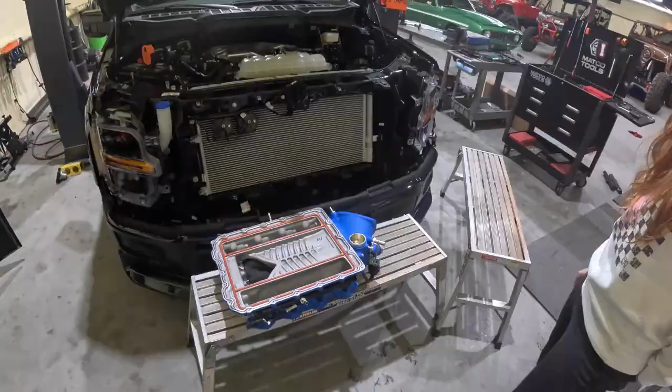Okay, so the next part that we're going to do is we're going to throw on the supercharger onto the motor. I've got my assistant here. She's going to help me get this up onto the motor.

So I'm going to go ahead and switch cameras to overhead view so y'all can see better what we're doing as we're installing this. So I'm going to get this off of my head, get this put up, and then get some video of the overhead shot.

This will be a little bit easier for me to get this into the engine bay. You got it? I can just set it and rest it there. All right, stop there. You got it? Go ahead and get it inside the engine bay. I'll need to reach. It's fine.

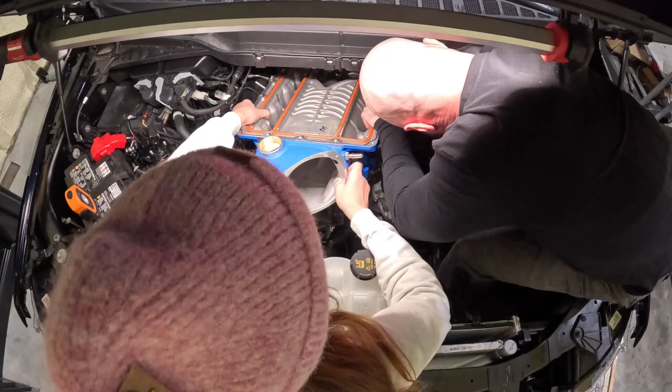Okay, hold on. There's some stuff out of the way. Let's see if I can get this other piece back in. Where did it go?

All right, so for the next part, we're gonna get these short bolts in the corners and then get them hand tight. We're gonna need some blue Loctite. So let's get those installed and then we'll get the interior bolts installed.

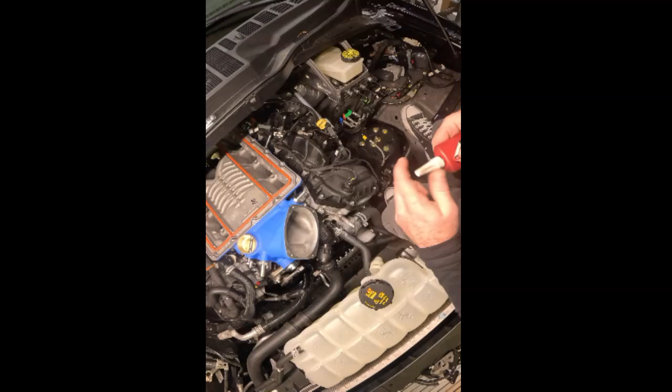Okay, so after we got the supercharger base put down and the 4 corner bolts hand tight, we're going to get this last bolt into the supercharger bracket. It's going to go up top here. So we're going to thread that in, and that's going to be torqued to 22 foot-pounds.

Okay, now for this next part, once you have the O-rings installed on the bolts for the supercharger, we're going to get these put in, blue Loctite, and then there is a specific torque order. So you're going to do 2 passes, one at 88 inch-pounds and the second at 106.

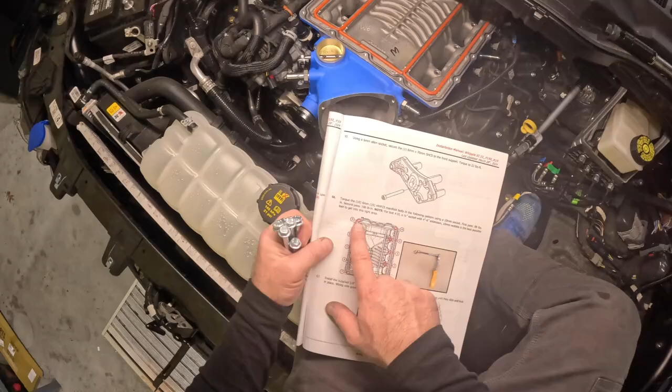Not gonna lie, this number 9 is so hard to get to that I'm just gonna have to do it by feel and hopefully get it torqued down properly. All the rest of them I can get to. That one has been a real pain in the butt. So let's get these installed.

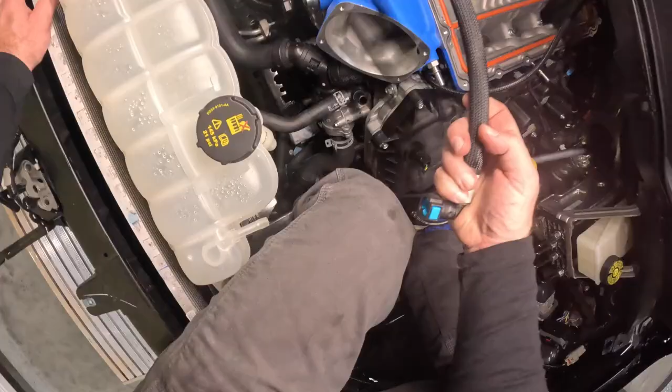All right, so this is just getting on the rear. Also the 90 degree. This one's a 45. This is gonna go on the driver's side. So this is driver's side.

All right, once we have that crossover tube installed in the rear, you're gonna connect the MAP extension connector to the MAP sensor that is in the supercharger. I actually already ran that, so mine is already plugged up. I just found it easier to run that now and get that hooked up and out of the way.

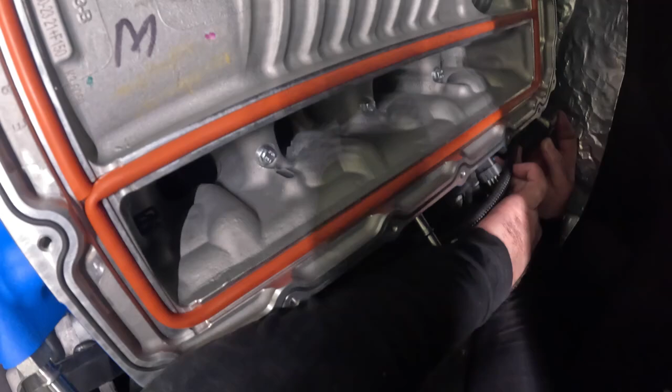So I'm just going to go and plug in the 2 fuel injector pigtails to the stock harness on both sides, and then we'll move over to the pigtail for the throttle body. All right, got that installed.

Now we're gonna run the pigtail for the throttle body. I think that's gonna loop under and come under here. I'm gonna take a look. Or actually, it's right there. Oh, let's see.

All right, so this is the throttle extension wiring harness, and it will say throttle extension on the tag. So this is gonna go and connect into here, and then lock it, and then it says to run it underneath the throttle bracket. Actually, I think this way is going to be easier.

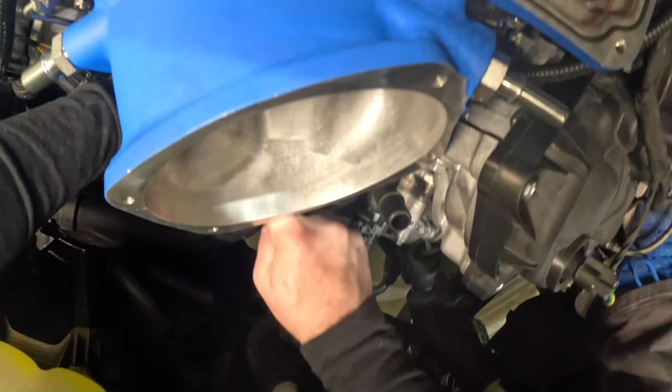Okay, that is easier. So fish it through with the small end first, the female end through, let's see. So underneath and through until you hit this connection. So this is going to go this way, and it'll keep it up and out of the way of the belt.

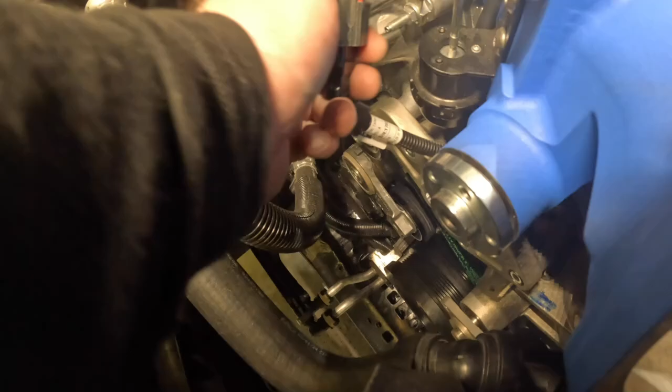And that will stay up out of there, so that way it doesn't hit the belt. And it shows to zip tie it, but we'll keep it loose for now so we know which way it's going. But it looks like it's zip tied somewhere up in here. I think it's this way, or maybe it's this way. Anyways, get that done up and out of the way, and we'll move on to the next step.

All right, the next step is going to be reinstalling the water pump pulley, and I'm actually going to jack my truck up. It'll just be easier. So we'll get that installed, and I believe it's 14 pound-feet to torque them down.

All right, it says to torque them down, but there's no belt on there, so there's no way that I'm gonna be able to get it torqued properly. So I'm just gonna tighten them down, and then we'll torque them down when we get the belt on there.

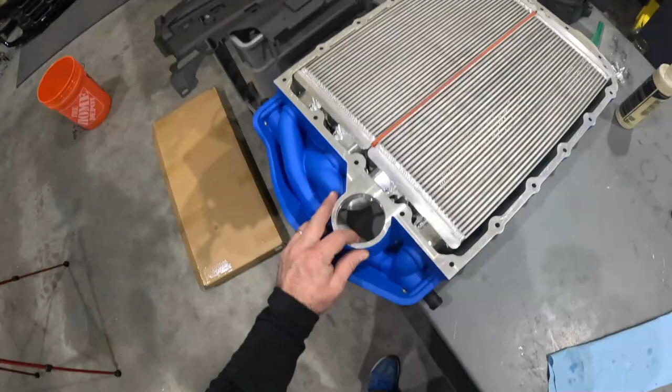All right, so next we're gonna install the bypass O-ring on the lid passage, and then just grease that and install that. So that's gonna be here, this is where the intercooler brick is at, so this is gonna get installed right into this passage right there.

It says to use a generous amount. So whatever that means to you.

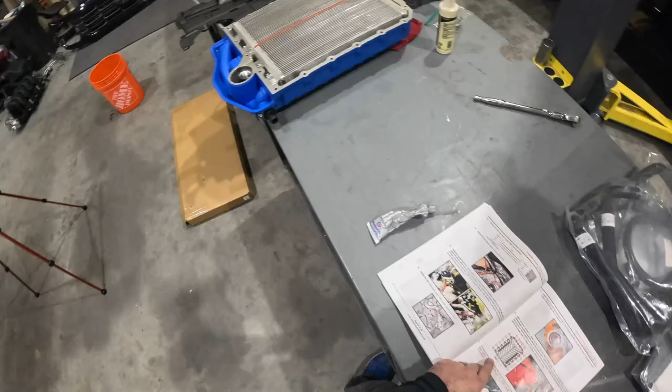All right, once we have the O-ring installed and lubed up, it is now time to install the lid. So it gives you torque specs, torque pattern, and then I think it looks like there's 3 bolts in the front that are going to be a different length. So check that, I'll get that out here in just a second.

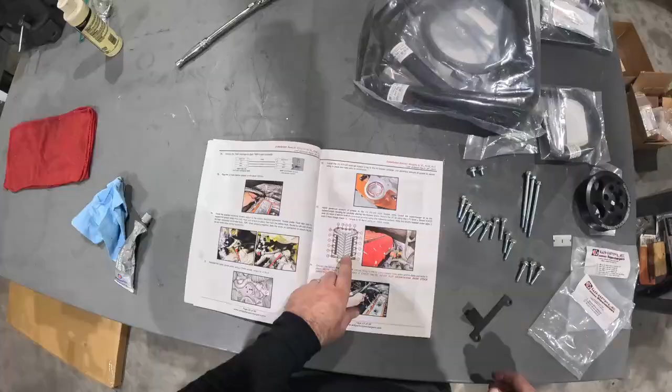All right, once you have that lid on, you're gonna get the bolt kit, and we're gonna start locking everything down. Okay, so for the bolts, you're gonna get a bag of lid bolts, and then you're gonna have some that came off, or that were already on there. I took mine off when I set mine out for porting.

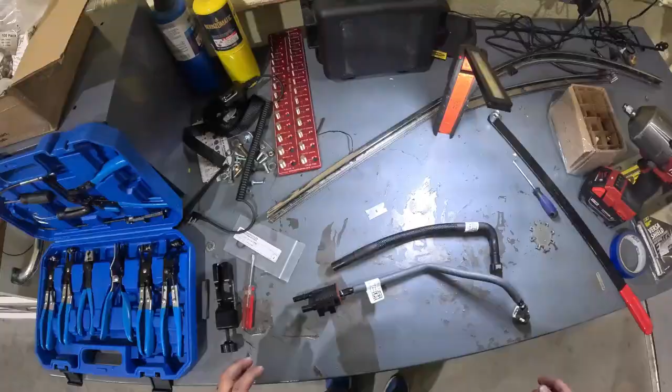All right, so this next part with the EVAP, I had actually been fighting this because I did not know, or I didn't read properly, that this tube is supposed to replace the one on here. It doesn't specifically say that in the instruction manual. It just says to install with supplied 45 or 55 degree push fitting, but it doesn't say anything about cutting this off and replacing it with this, so the instructions are not very clear on that.

I just happened to see a picture and it did not look like this same tube, so I went searching through all this stuff and found this tube, and I'm assuming that this goes to it, so hopefully this is what it's supposed to be. If not, then I'm about to have to buy a new EVAP solenoid. So we're gonna cut this off and install this, and then reinstall this whole piece.

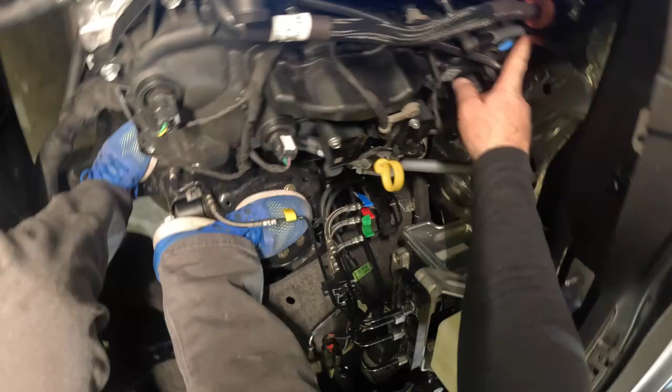All right, looky there, that worked. All right, so this had to flip up versus the way it was down on the intake manifold, so everything would clear. So just make sure all these fittings, you press them in and everything locks. And should be good to go on that. And we'll move on to the next step.

All right, so for the next part, we're actually gonna reinstall our hoses from our catch can.

All right, we'll probably have to play around with placement for this, just because everything's going to change, because we still have coolant hoses that's going to go in there.

So this next part, we installed the coolant overflow hose. There is a check valve here. It's going to go closest to the coolant overflow tank, and the other side goes to that 45-degree barb we put into the filler neck. You'll have to get some needle nose down in there to get that clamp on. The hose ends on this side and this side are two different sizes, so if you forget which way it goes: the larger hose end and the check valve goes towards your overflow tank, and the smaller hose end goes to the 45 on the water neck down there.

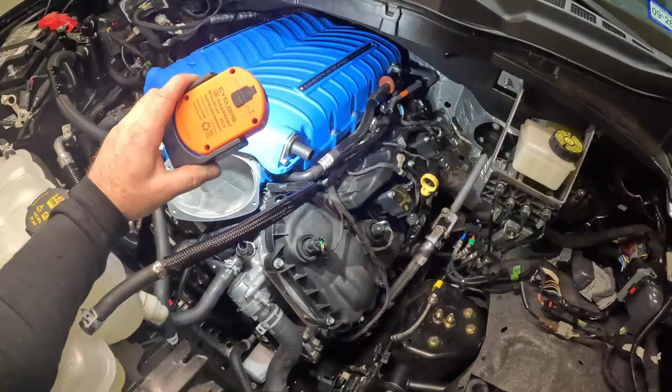So for the next part, we're going to install, what was it? Oh yeah, the idler pulley. So we're going to get the smooth idler pulley, spacers, and T-nuts, and install that.

So what we're going to need is the smooth pulley. You get two, one ribbed, one smooth, so this is smooth. We're going to do this with this stepped spacer, and in the bag it comes with two other spacers that look identical. We're going to use one and put the other back in the bag to save it. Then in the bag is this, what they call a T-nut. And in the bag we got those other bolts out for the bracket, you'll have two of these larger cap sockets left, so we're going to use that for this as well.

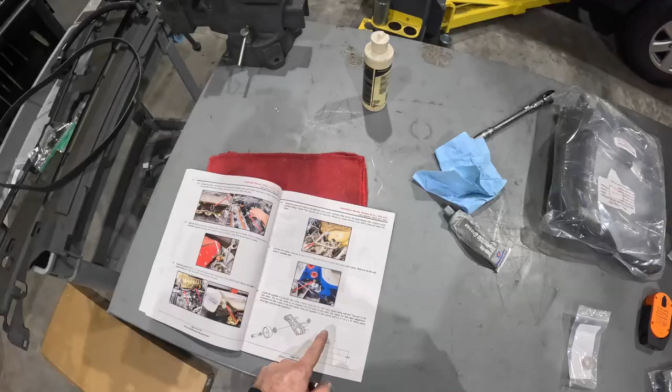So it says to install this behind the bracket, this behind the pulley, and this in front of the pulley. Your bolt goes through here, and then you bolt on. It says to do it hand tight, so we'll just thread that in there until we get the belt on.

I don't know if it matters or not, but in the instructions it was showing that the thread side was up towards the hood, so that's the way I'm going to install it. It doesn't specify either way.

All right, so that is on there, hand tight.

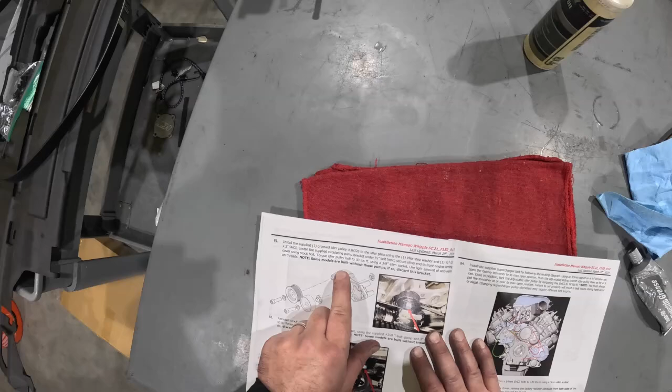Let's move along. Okay, it looks like we're going to install the ribbed idler pulley next, and we're going to need another one of those bolts and a spacer, and a bracket for, what is this, a circulating pump bracket, which I do not have in my truck, so we're just going to install that pulley.

Make sure that aligns. Mine was a little off because it was stuck in between the bracket and the spacer. So I just checked that, made sure all this stuff spins freely. And we're going to install the belt next. Actually, we're going to install the supercharger pulley next.

So install this hand tight. Okay, so we're going to get these bolts, put them on hand tight, 5mm.

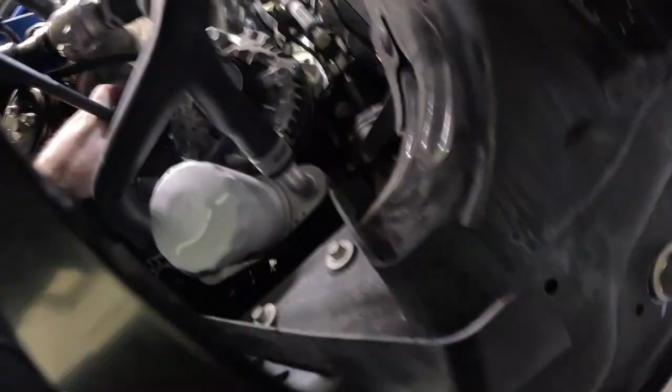All right, so once this is installed, just check to make sure the belt is in the grooves and runs the proper way. All right, oh, that looks good. It goes around. Alternator looks good, all right. Looks like the belt is good. Let's keep moving.

Okay, so yesterday we left off. We had just got the belt put on the supercharger and wrapped it around. Now the next step is going to be to get your idler pulley torqued down. In order to do that, you need to move your adjustment idler all the way, and then once that's moved, you can move this because it's on that little T-slotted bolt or nut. Pull this down, and once it's pulled down, you're going to torque it down to 18 foot-pounds, and then you can release this. I don't know how well this is going to get shot, but this is what you got to do to get this done. Let me get this camera back on my head because I got to use both hands to get this done.

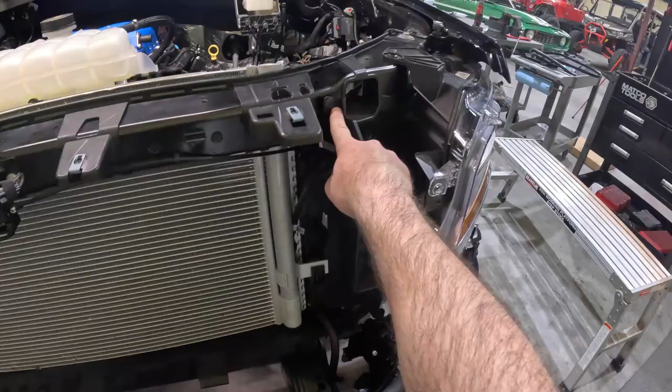This next part we're going to move on to the cooling system. The next thing you're going to want to do is remove this closeout on both sides. You've got two push pins here, and then 1, 2, 3 here, and one at the top. Same thing on the other side, one at the top, 1, 2, 3, and then 2 here at the bottom. It states in the manual that the passenger side will not be reused, but the driver side will be reused. So let's get all those pins out and get both those pieces taken out.

All right, we got both of those off. If you need to cut them, cut them. They sell these push pins at pretty much any auto parts store, so you can get new ones if you need to. Once those are out, we can move on to the next step.

All right, so for the next part, we're actually going to remove this entire horn assembly. You're going to need to unplug it and then remove the bracket assembly.

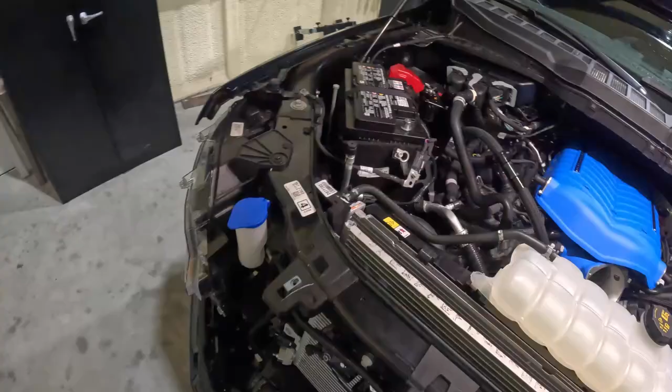Once we remove the horn assembly, we are going to install the heat exchanger. We're going to get all these parts, the heat exchanger, the bracketry, all that, and get it installed onto the vehicle.

To install the brackets first, you're going to have a driver's side, which is left hand, and passenger side, which is right hand. You're going to install these first onto the truck so we can install the heat exchanger after that. You're going to get a bag of cooling system bolts.

And then we're going to need this clip bolt, this... what do they call it here? Dowel nut. So we're going to install this dowel nut.

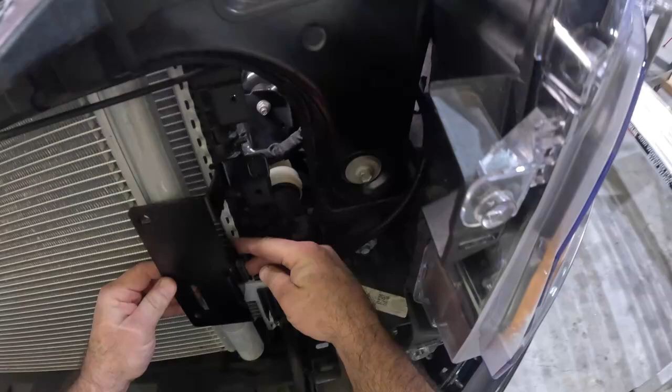All right, so they give you a little piece of rubber inside there. This is going to slide into this notch. And then this is going to slide over this bracket from the condenser, hopefully. Might need to get a screwdriver to open that up.

Alright, then we're going to get this dowel nut. It's going to go in here - I don't know if you can see inside here.

Okay, so it doesn't say anything about this in the instruction manual, but sitting here messing with it, it looks like this bracket is going to go in place where there is a bolt for the condenser. You're going to need to pull this out, put this J-clip in, that's going to bolt through, and then they give you a new bolt that's going to bolt through here. The bolt that was there previously is not long enough to fit in there, so you're going to have to use this one they gave you. It doesn't say anything in the instructions about taking that out and putting this in its place, but that is the only place that I can see that it is going to be able to go.

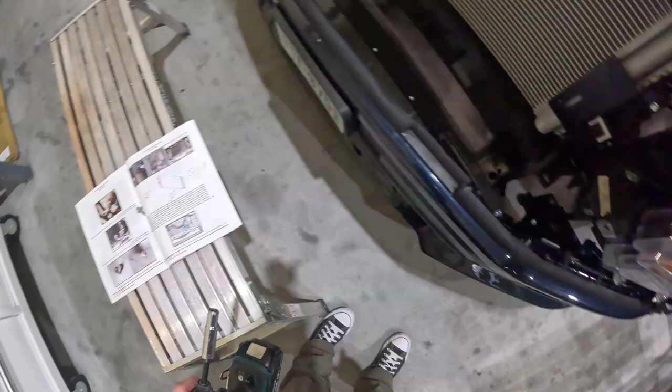So hopefully that is in the correct position. We will get the heat exchanger and put it up and see if everything goes on. If you can see here, this goes through here, that bolts down. You have a piece of rubber that goes around the bracket from the condenser, and then this slides over that to help secure it as well. So that's how that side goes on. And then those are torqued down, but I'm not going to do that yet. I'm going to put the heat exchanger on first, get everything aligned, and then torque everything down.

All right, so as you can see, I fit the heat exchanger up inside here. It's loose. Basically, this plastic piece is just really holding it up. I don't have anything bolted down yet. I wanted to get this placed.

So you're going to have a bag with these little spacers in there. And then you're going to get 4 bolts, 2 for each side. So this is going to go in, looks like, yeah, with the ridged side in.

And these are 13 millimeter. All right, so we got that bolted in.

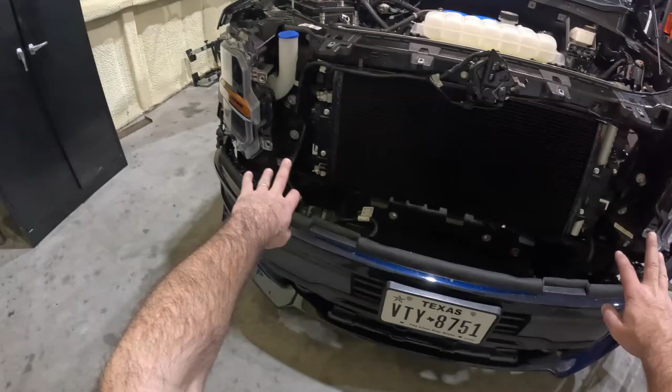So basically I kept the brackets on the side loose so I could get the heat exchanger to align with those spacers and those holes. So I got that bolted down first, and then I aligned the brackets up to get everything flush and then tightened those down. So once you get everything tightened and torqued to spec, we can move on to the horn relocation bracket.

Okay, so for the horn bracket, we actually have to remove the horns from the stock bracket, and then it's going to be on the reverse side, so they're going to be facing out instead of in like they were before.

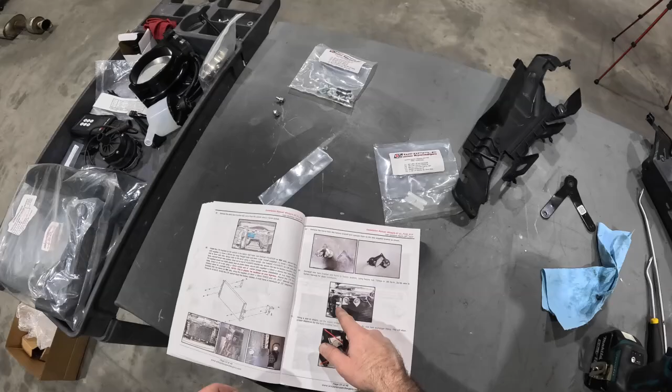Okay, now that we get those reinstalled and we've moved them to the other side, this can go on into the factory location, so this spaces them out from the heat exchanger. Then if the wiring harness is in the way, we'll just need to zip tie that.

And that's it. All right, so I had to rotate mine to get this to even plug in. I didn't have enough slack. Doesn't really matter which way they're oriented, just as long as they're up and out of the way, and there's clearance there. That's all you gotta do. I don't think that's gonna interfere with anything.

So the next thing that we're gonna do is, I believe, remove, I think it's this tab right here, but let me look. Okay, so it looks like we're gonna remove this portion right here to allow the hoses to come down. So we're going to cut here. I'm going to use my oscillating saw to just remove that real quick, and then we'll move on.

Okay, so we're going to remove some of this portion of the plastic right there. Yeah. All right. Once we get that removed, should have enough clearance for these hoses to come down. I'm probably going to take some sandpaper, clean that up real quick, and then we'll get moving.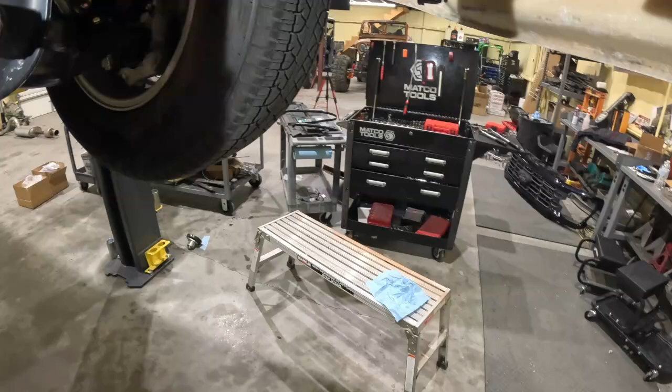Okay, so the next thing we're going to do is, we are currently under the truck, and we're going to move on to installing the pump bracket assembly. So this is going to go to the furthest most point, so right here. So you're going to have two squares, two holes. So you're going to get your J-clip, and you're going to slide it through. Okay, so once you get your clip in, then you're going to install the bracket.

They're going to have a bolt in there with a washer, which I don't really understand why they want that on there, because of the bolt that they put in there, but whatever. We're going to install this and bolt this up, and then we're going to get our pump and bolt it onto this bracket. Okay, we're going to get our bracket with the T-bolt there for the clamp, and we're going to put this around and lightly snug it up.

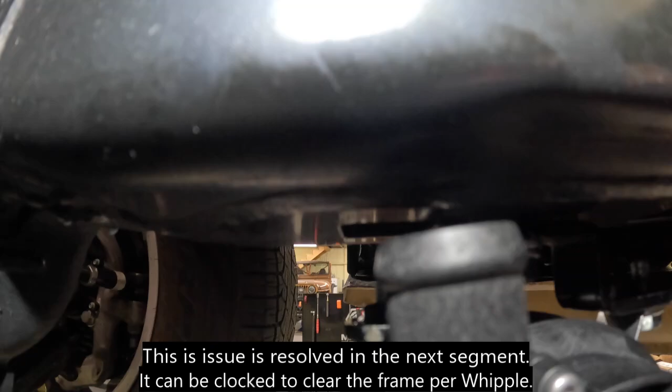Okay, so we have our pump installed. However, I don't know if you can see, this, I think it's the exit tube, is right underneath the frame, and so I cannot get a hose on there. So I have a call into Whipple to see if this is a known issue, if it gave me the wrong bracket to space it incorrectly.

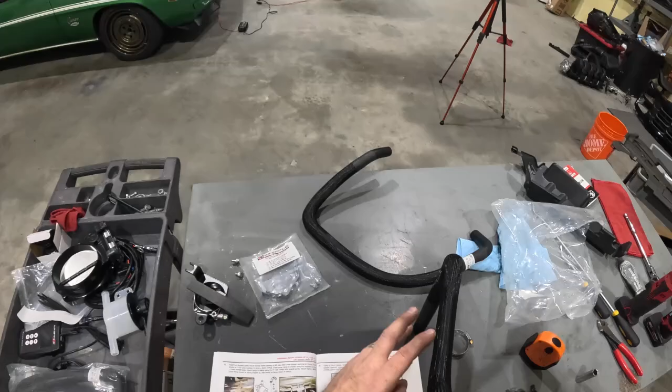So I'm going to wait to hear back from them to see what the fix is for this, but we're going to continue on. We're going to get the hoses put on, try to get the rest of it done while we're waiting for Whipple to get back with us on this. Okay, so for the next part, the first hose that we're going to install is going to be this part number right here, which has a 90-degree on it, which is this one right here. Part number matches the book.

So this is going to go into the bottom of the heat exchanger and into the intake or the exit, so the top tube of the pump, which currently is not spaced where I can get to it. So we're going to install this, kind of leave this loose until we figure out. If anything, I might just space that out myself with some flat stock, some longer bolts, washers or something if it comes to that. But we're going to get this up in there. You're going to need 2 of these hose clamps as well to get this installed.

All right, once you got that on there, that is tight, so hopefully you got some decent set of pliers or a hose clamp tool. So this is going to go down, and this is going to go into the top eventually of the pump. So since we can't put that in yet, we will move on to the next hose.

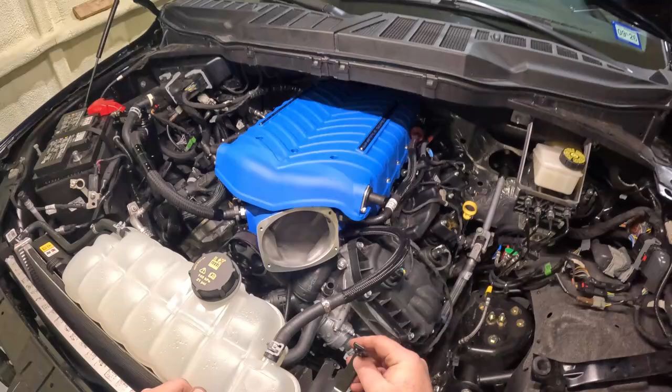Okay, so the next portion of the cooling system is going to be their surge tank. That comes with a bracket. You got 2 small bolts. This is going to slide underneath the factory overflow tank, and then this is going to bolt to that.

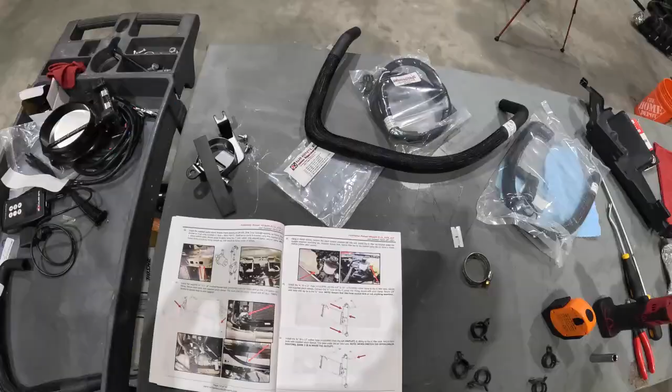All right, that's nice and secure. Let's move on to the next step. Okay, so the next tube that we're going to install is going to be the filler reservoir pump tube. So it's going to be this part number right here, and then also the overflow, which is going to be in this bag. So it would be 3098 part number.

So you're going to secure both the reservoir, and it's going to go into the intake of the pump, and we're going to put hose clamps on both of those ends and secure that. All right, once you get that secured, then we can get the overflow hose done.

All right, I'm assuming that it's supposed to just go onto the ground because it does not say to connect it to anything. Okay, well, we'll just move on to the next one. So the next one is going to be 3092. This one, yes. So this one is going to go from the reservoir to the supercharger on the driver's side.

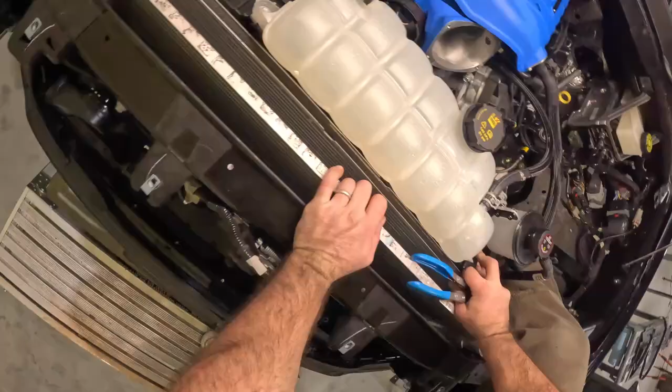All right, now that we got that driver's side hose put on, the last hose is going to go from this upper on the heat exchanger to the driver's side, or passenger side.

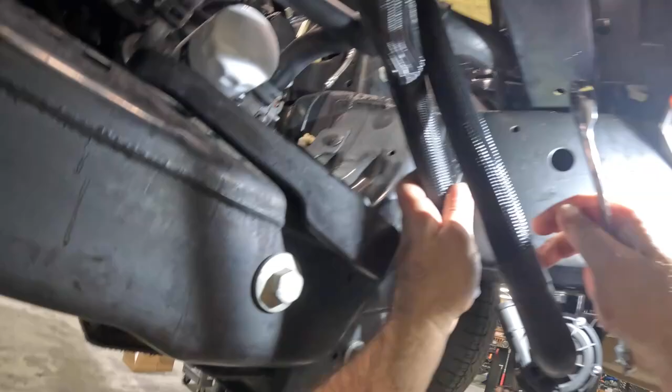All right, now that we get that routed, we can move on to the next step. Okay, so Whipple just got back with me on this, and even though this says it needs to be straight up and down, they said you can clock this to clear the frame to be able to put the hose in. So I'm loosening this up. I'm gonna rotate this down a bit. Get this hose. See if I can put it in there. Actually, I need to move that.

All right. Once we got that on, get this thing locked down. And I might move it back over, depending on if I got room. Okay, so once we have that hose in there and it's not kinked or bound up, go ahead and retorque this down, and then we can move on to the throttle body.

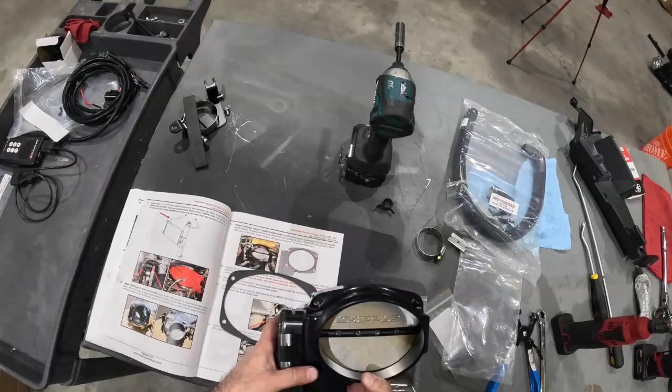All right, the next portion, after we've just messed with all that nonsense, is to install the throttle body. If you have purchased a stage 2 system like I have, it will come with a new throttle body, a gasket, losing my mind here, and bolts.

Now it tells you how to torque them, so you're going to have one pass at 89 inch-pounds, second pass at 139 inch-pounds. You have one longer bolt, which is going to be obvious on where it's going to go. It's going to go into this slot. All the rest of these are shorter. So let's get this thrown on. And I think it's going to be a 5mm.

Okay, so once we've got that in there, we just need to torque them down. So this first pass is going to be 89 inch-pounds. Second's going to be 139. I'll go look at it again.

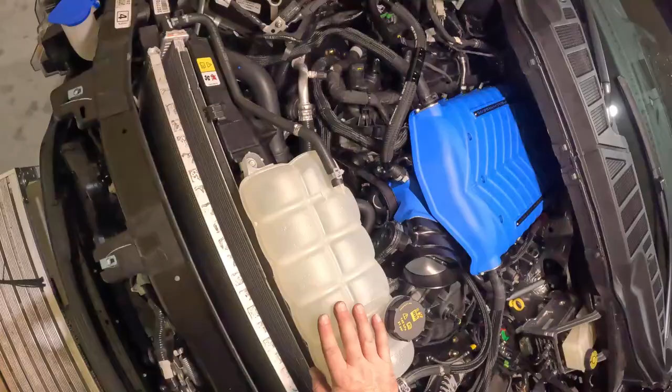All right, and then we're in the second pass, which I just forgot what the number was, even though I just said it. It's my ADD and dyslexia. 139. 25, 35, 39.

All right, that is torqued down. Now we'll move on to the next step. Okay, so once you get the throttle body on, you're going to want to get your extension harness plugged in. Make sure it gets all the way, and then lock it down, and then check to make sure that it's not going to come into contact with the belt. Looks like there's plenty of room. I might zip tie that just in case, but that is done.

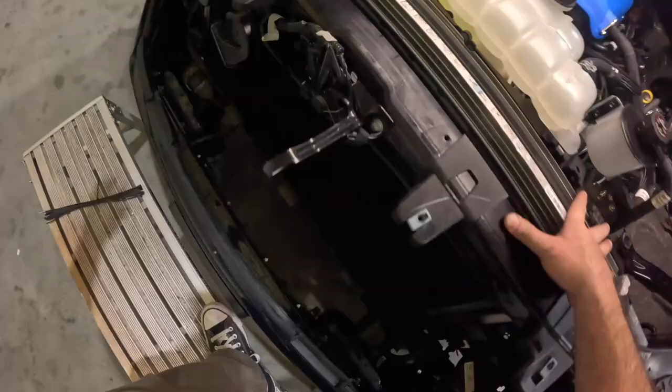Now the next part is going to be reinstalling the entire grill assembly. So just reverse everything you did when you removed the grill. It's going to go opposite, going back on. So we'll get that thrown back on.

Okay, before we get the grill put on, there's something that I missed, and that is the stock heater hose connection. So I thought that this was going to be able to work with this, but the way that the fitting is, because of the 45, maybe a 55, and the way this hose routes, you wouldn't be able to get this in there without this hose hitting the supercharger pulley. So in the kit, they actually give you a new heater hose and connection, which is all loose.

So this is the stock connection. And then they give you, where the hell did I just put that? Okay, yeah. So they give you a 90 to go in there. So hopefully I can get this to orient properly and get that on there.

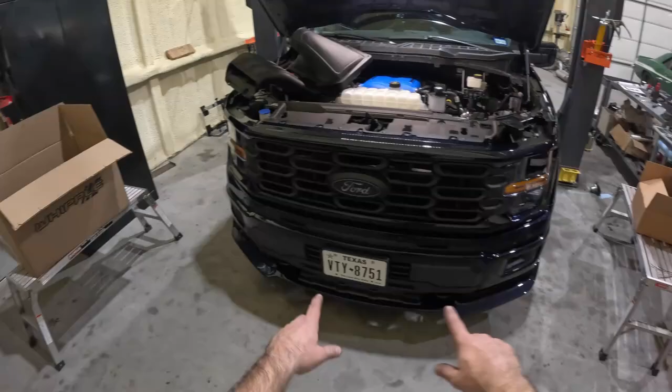All right, so after we get the grill assembly back in and then the filler panel back in and everything bolted back up, we are basically in the home stretch here. We're gonna install the Whipple air intake. A couple things you gotta do though is these grounds that are here, you're gonna need to bend down so they don't come into contact. Make sure everything else is out of the way.

I might have to relocate this, I'm not sure yet. I might just have to run it on the outside here. But we're gonna fit this in, so this is gonna go back and push in where it did factory. So hopefully this goes back in. All right, that took a little bit of work to get in there, but that sits down there. So then you just need to put your push pins back in, and then we can move on to installing the piping to the throttle body.

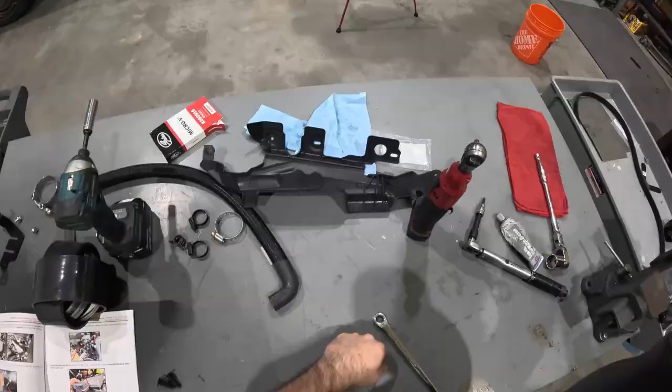All right, so for the next part, you're going to get your intake tube, and there is a grommet in the pack where the throttle body gasket was. So that's going to go and get inserted into the intake tube, and then you're going to put this hose barb that you're going to plug your clean side back into.

All right, so you got that there, and then we're gonna get our couplers and band clamps and get this installed. So there are two different size silicone tubes, one for the throttle body and one for the air box. So just make sure you put them on the right side. It pretty much can only go one way.

All right, so we've got the intake installed, and honestly, it took me quite a while to fit all this in. So I'm just gonna give y'all a heads up. This is gonna need to go in multiple pieces. You're gonna need to put the base in first, then your tube, then you need to fit this in.

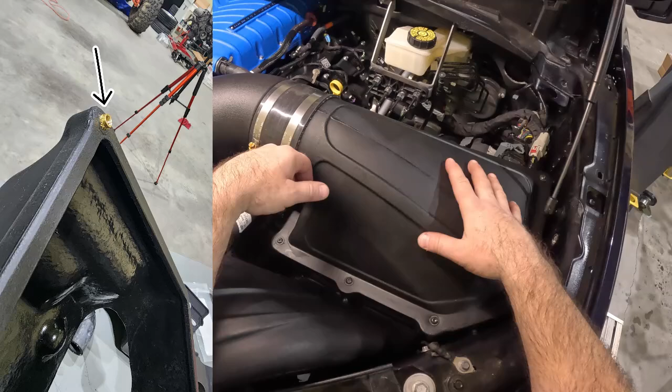Now, when you go to tighten all of these down, inside the base here, there are brass knurled press fit nuts that are pressed into the plastic. Those are all pieces of crap. This is the biggest piece of crap intake I've ever installed in my entire life. Just hand torquing these bolts down, it's supposed to be 50 inch-pounds. I didn't even get to 50 inch-pounds before 3 of those knurled brass nuts pulled completely out.

So if that happens to you, what I did is mix up some JB Weld, got the brass knurled nuts and put JB Weld on the bottom and then around the sides of where the knurling is. Got a torch and heated up the plastic a little bit so it was soft. You're not trying to burn anything, you're not trying to melt anything, you're just trying to get it soft.

I repressed all of those knurled brass nuts in there with JB Weld, and then JB welded around the edge of the top of the knurled nuts, and then let it sit overnight, sanded it or filed it flat, and now I got it reinstalled. But just to let you know, be careful when you're tightening this down. It obviously does not take much, because I was using hand tools, not even any power tools, and they pulled straight out.

And then it's been a fight trying to get this and everything in here. I mean, this wiring connection here, the hood strut brace here, trying to fit everything around here. I actually had to use a pry bar to move everything out of the way, so it's a pain in the butt, and they need to change this design, honestly, for these trucks. But we'll get moving on to the next portion of it.

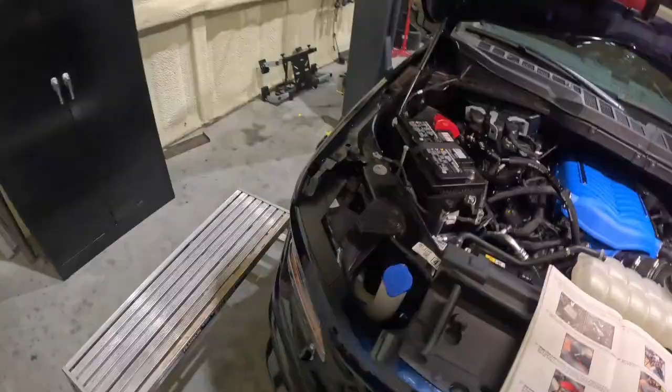So the wiring harness, you're going to come over here to the passenger side. There's going to be a fuse panel. You're going to pull this up to expose all the fuses. I'm not sure, it's just that side. Okay, yeah, so it is this most left one, because you got two covers here.

Actually, you do need that. All right, let's take this off too. All right, so let's remove this wiring harness block that's attached into here. It's just a pinch clip, and then remove this piece as well, because I think we're going to need to get into one of these lugs for power, I believe.

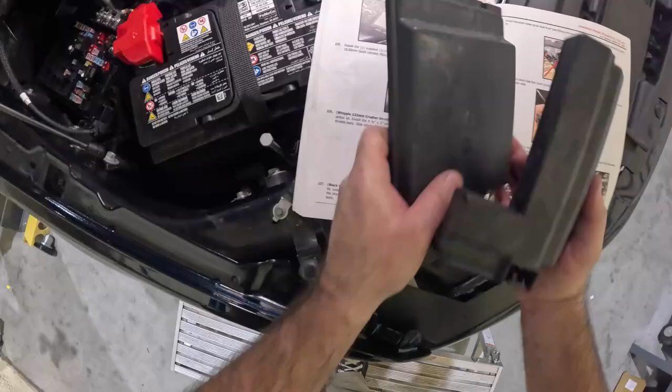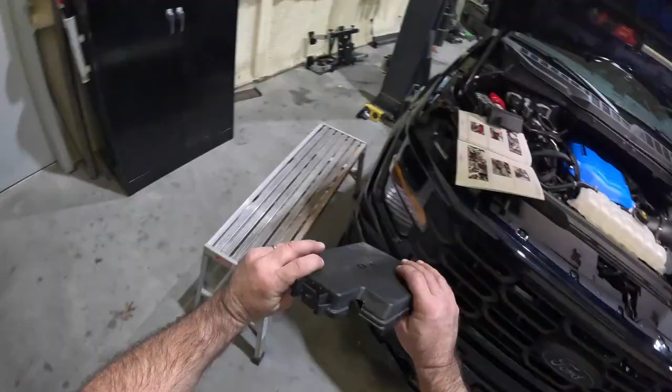So the instructions say that you're going to have to notch this corner right here. So we're just going to go in here and cut a little portion out for the wiring harness to fit through. So let's notch that real quick. All right, now that you got that cut, however which way you want to do it, we're gonna get the wiring harness.

So the wiring harness will be this piece right here. You'll have your relay, your fuse. This is going to be power and fused switch. This is going to go to the pump that's below, and you should have a ground there. Here we go. And then you're going to ground it here.

So this relay, there is a spot below the battery tray that has a hole in it that you're going to put this push pin through and push that pin on there, and that's going to capture that relay. So then you can start running the rest of the wiring harness.

Okay, so you're going to run power and ground over towards the relay box, because I think I'm going to use this ground right here by the fuse block, and then power and ground goes there, and then we're going to run our plug down towards the bottom. And let's kind of pull this through and get that zipped up and situated here in a minute.

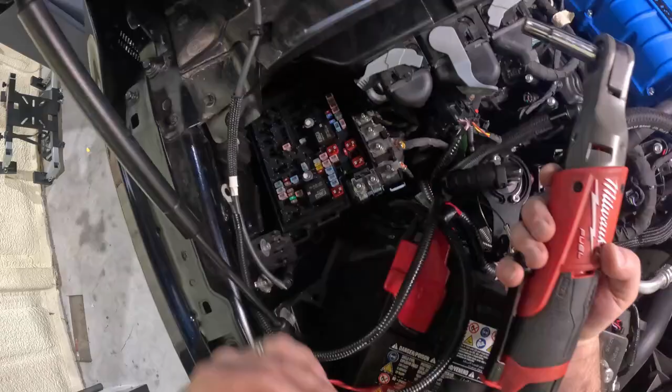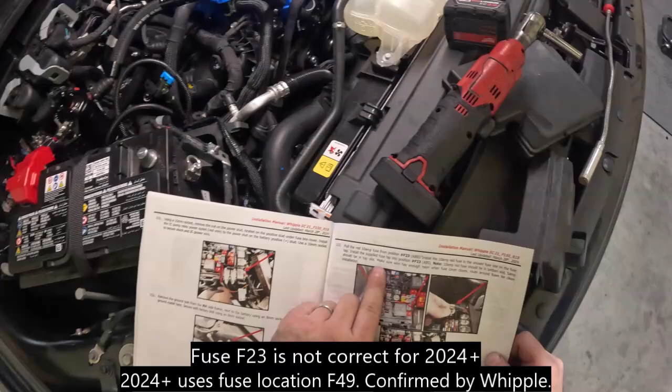Okay, now that we've got the positive on there, we're going to run negative to this post, which looks like that is an 8 millimeter. All right, once we got the negative tightened down, get the fuse amp put in to position F23.

Okay, so I did some digging and found the instruction manual to the Ford Performance. So this is the warranty version of the Supercharger on Whipple's website. And they actually have a section on here for 2024 and up, fuse locations for the fuse. And in this instruction manual, it says to do F49.

So F49 is going to be, let's see, this third slot, you'll have a 5, a 30, and then another 5. So we're going to pull this 5 and then reinstall it into the empty slots on this fuse block. And then reinsert this where we took that 5 out. So let's get that pulled out, put this in, and then we can move on to our coolant.

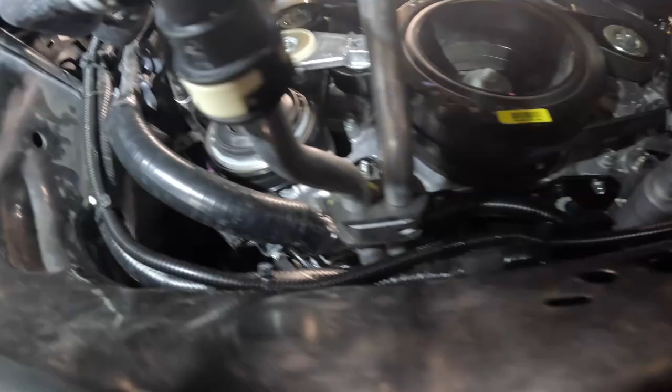Okay, so I just wanted to show how I ran the line down to the pump. So if you can see, it comes down here, and then I zip tied it to this wiring harness that goes at the bottom of the motor. You got your AC lines here, your balancer. So I zip tied it there, then ran it actually in front of the oil drip spout, and then ran it up and bundled it up, and then attached it to the exit side of the pump, up out of the way.

Hopefully that is out of the way when I do an oil change. It looks like it's going to be, so that one should be fine. It's not near anything that's moving. So we'll see, but we got to do an oil change on this thing because Whipple wants you to change your oil to 5W50. So that is one thing that we've got to do as well.

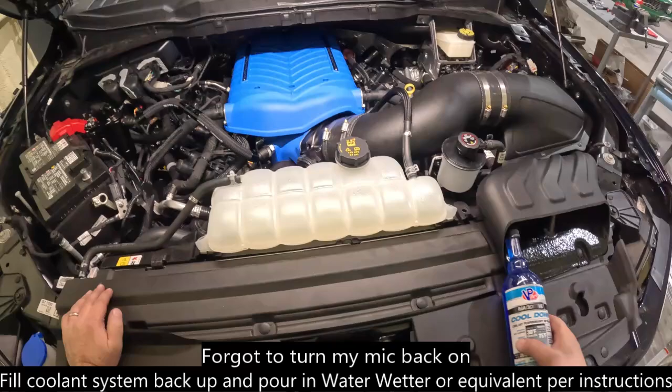All right, now that we got everything wired up, zip tied up, and checked, we're going to start refilling fluids and changing the oil. So first thing we're going to do is we're going to add coolant. They want you to add a bottle of Water Wetter. I'm going to use VP Racing additive, same thing. And this is just to help coolant performance.

So we're going to add this and then start filling the rest of it up with the coolant that we took out. And then if we need any more, we'll add as we go. We're going to need to purge this system of air.

All right, once we have the fuse all done, we can go ahead and get our negative battery cable onto the vehicle. It's probably gonna make some weird noises because it's been off for a while. And get this tightened down. All right, once we've got that done, we can fill up our coolant and then start purging the system.

One thing I forgot to mention is if you haven't already, make sure you reconnect your fuel pump relay to the fuel pump box. Make sure that's clicked and in there before you move on. So now we'll move on.

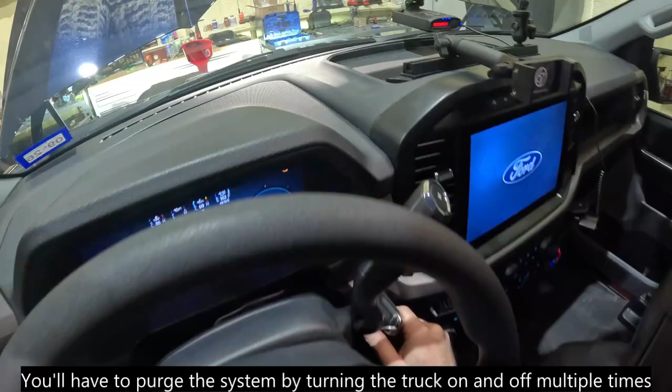All right, so after we have purged the air out of our cooling system for the supercharger, we're going to move on to changing out the oil. Just on the supercharger coolant, you're going to have to cycle it on and off to purge the air out of the system. Might take you 10, 15 times. It took me a little bit to get most of the air out. I think I'm pretty much there. Might have to do a drive cycle to make sure that there's no air in the system. But after that's done, we'll do the oil change.

So what you're going to need is, I'm using AMSOIL, but you're going to need 5W50 per Whipple's instruction manual and an FL500 oil filter. And I believe it's 7 quarts, if I'm not mistaken, to get that oil pan filled up. So let me get this done and we'll move on to the next step.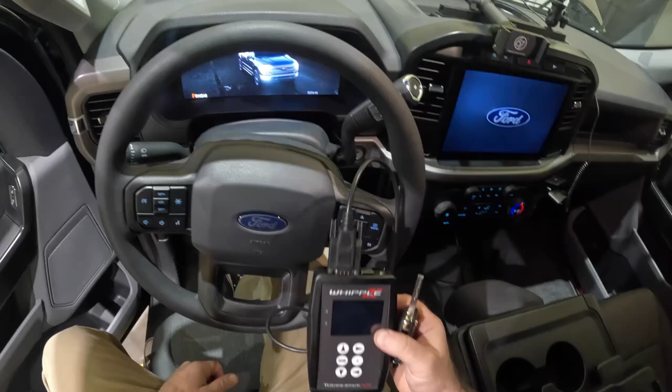Now that we've got the oil change done, it is time to download the tune that you requested from Whipple. So this should have been the first thing you did before you even started this, is request your tune file. So we're going to turn the truck on to accessories, plug up the Tomahawk, and let it do its thing. So it should basically be tuning and writing the code. A couple of buttons you might need to push, but it's doing its thing.

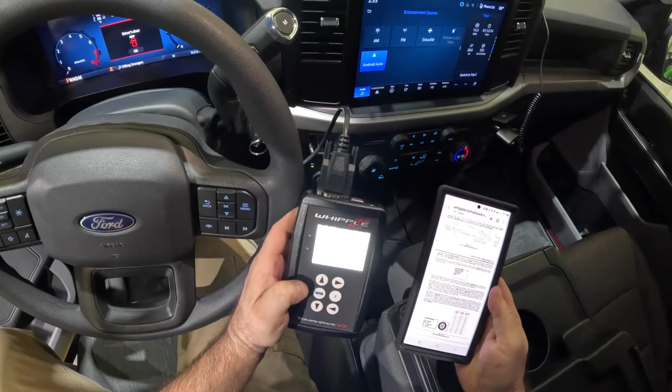All right, once it does its thing, I believe we go to programming, press enter. I guess push enter again. Okay, there we go. All right, so it's gonna go through its process. So let it do its thing and we'll be back.

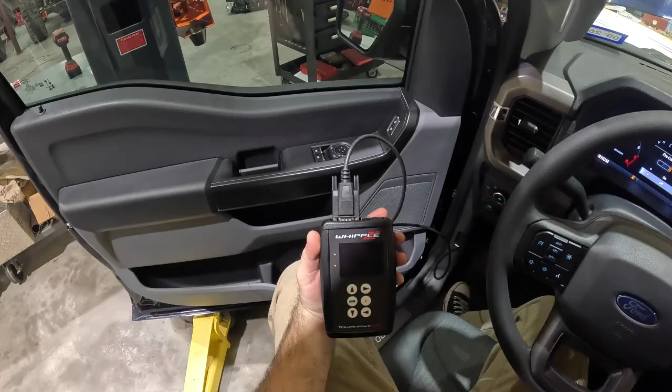All right, once it gets done, it'll say program complete. After that, you're gonna cycle the key off for 5 seconds. And then back on.

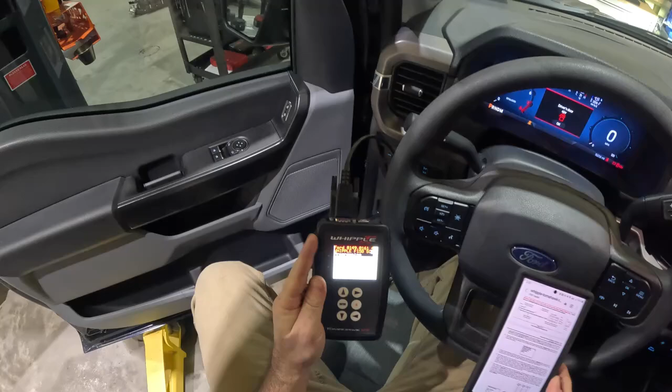And then you're going to go to diagnostics, press enter. See if it has any diagnostic codes. So no diagnostic code, so we are good to go. All right, after that you can start the vehicle.

All right, so we are here for the initial start, final phase, crossing my fingers that this thing starts. When you pressurize or when you turn the accessories on, make sure you have no fuel leaks or coolant leaks or any kind of leaks before you start the vehicle. So here it goes. I kind of want to throw up.

Woo! Holy shit. Oh my God. That's awesome. Woo!

All right, so next thing we're gonna do is we're gonna check coolant, make sure all the levels are good, make sure everything is topped off and everything is okay, nothing's leaking. But that's it. Oh, that's a lot of work. Oh my God. That's awesome.